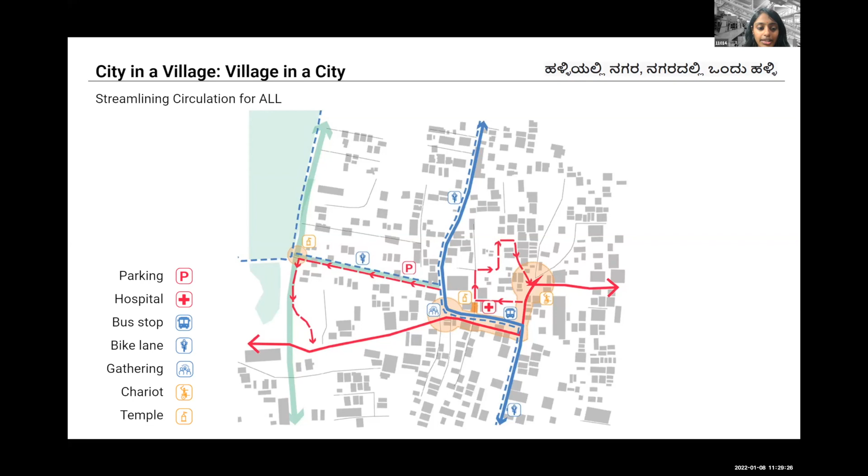The classic challenge of city being in a village and village being in a city is first addressed through a framework of larger networks. To maintain a sustainable relationship of the multiple modes, we have proposed segregated zones of lanes in the main Doddanekundi village zone. The narrow roads next to the temple and towards the lakeside are limited to one-way circulation. The bus stop has been relocated near the auto stand to enable modal exchange. And apart from cars, bikes, two-wheelers, buses, this project considers the chariot procession route as a part of the main traffic planning. So what are the different ways we are creating convergence?

We extend this framework through three integrated principles. First, temporal adaptability, to design spaces that are flexible to multiple programming. Second, adjacencies, creating synergies by positioning complementary activities together. And lastly, hybridity, reimagining elements to perform diverse roles and not cater to singular interests. So embodying these three principles, the site strategy is almost like a design framework.

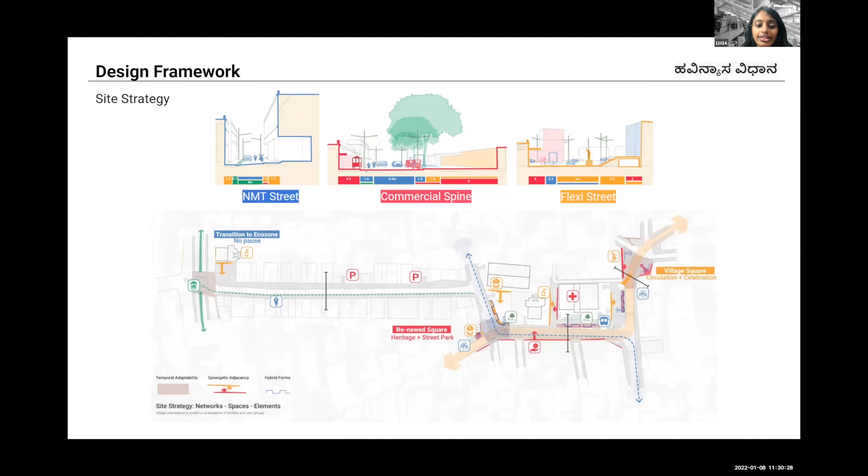A unique character has been identified for each street, and moving from right to left, we see a flexible cultural zone of the village square, then a social and commercial zone near the temple and PHC, and an ecologically sensitive non-motorized transit zone towards the lake. The street between the PHC and the temple right here is pedestrianized. The area around the inscription stone is reconfigured to create a renewed square, and edges of the institutions are reimagined as creative hybrid zones.

How can we maximize space? The challenge that a congested urban village poses is the availability of space. We reimagine compound walls to maximize space and create new social and cultural opportunities within this congestion. Peripheries are reimagined as zones that are reclaimed by the public to use in multiple ways. The modularity and temporality of the elements allows for affordable uses.

For example, this area can be used for prasadam distribution, evening gatherings, floor-level vending for tender coconut stalls and cobblers, and smaller day-to-day kacheris. A PHC kiosk has been integrated to cater to the Thursday vaccinations, which reduces crowding in the main PHC center. A bike stand and docking enables easier and increased access.

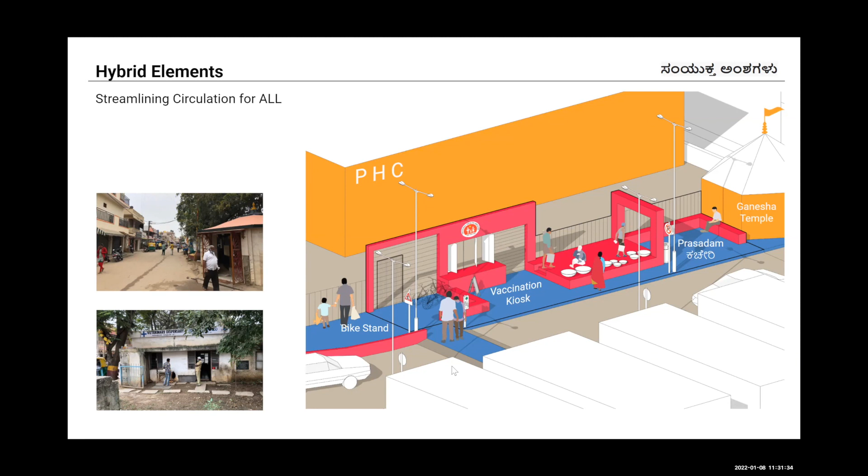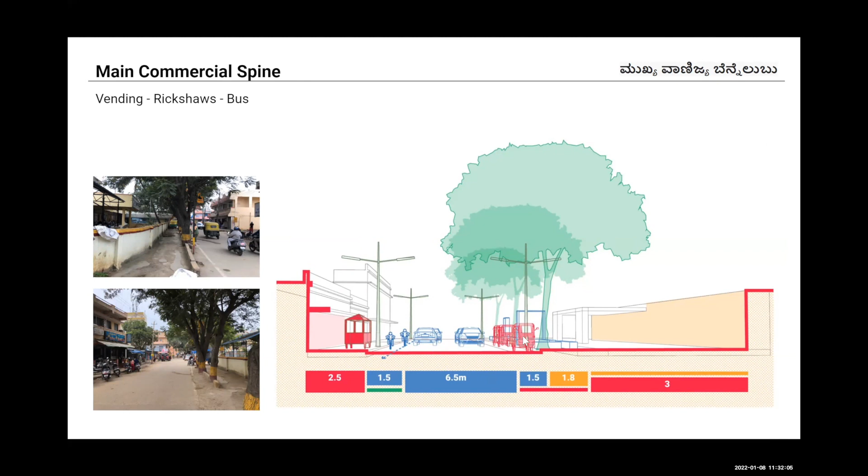The wider street is imagined as the commercial spine of the village, with auto rickshaws, cab drop and pickup, and bus stops planned within the spine for easy access. There is a wider sidewalk that is bordered by vendors facing inward rather than outward as currently. A two-way bike lane operates more comfortably for bike riders alongside fast-moving traffic. The hybrid elements provide a space for relaxation of auto drivers under the trees, thus layering multiple zones together that lead to a flexible junction.

So how can we make these junctions flexible? While separate lanes channelize the traffic on streets, the junctions will be made more adaptable with different programming over changing times. Thus, we imagine these junctions as flexible and transitory spaces that accommodate both requirements for the festivals and the cars.

So coming to the village square, the junctions currently see traffic congestion but also become a potential socio-cultural node in the urban village. The square is a temporal zone that transitions with changing needs of circulation and celebrates in a culturally rich-rooted context. On a day-to-day basis, the grey road continues to operate seamlessly for the vehicles to pass, and on the days of celebrations, the celebrations happen on the blue zone and traffic continues to move without disturbance on the side.

There are several elements supporting these festivities, like the hybrid elements for temporary stalls with the vending demarcated by the removable bollards. On the right, a multi-level step seating is designed to watch the Paliakki Uttsava, similar to the Mysore Dasara processions, while on the other days it acts as a public space.

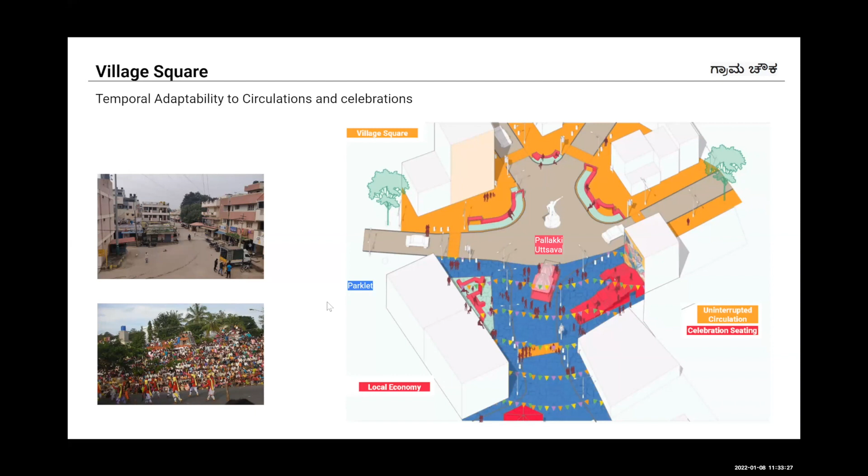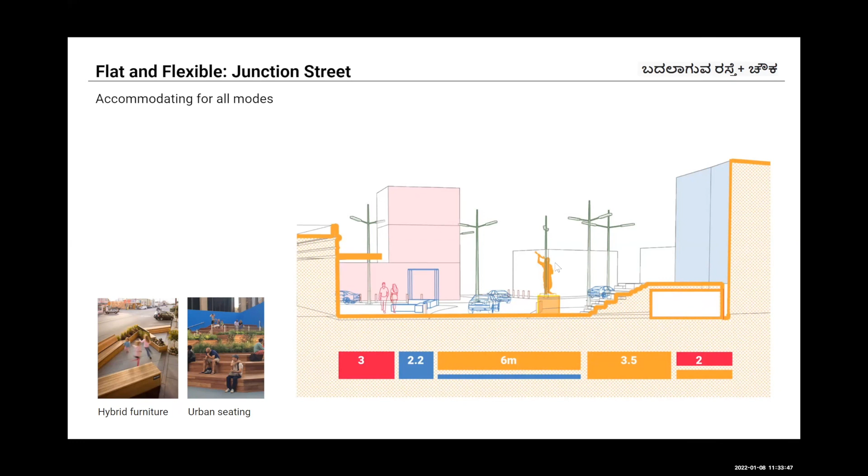The junction sectionally is flat, but with a cobbled paved zone that would allow the traffic to slow down. Considering the scale and the nature of the place, instead of having a traffic signal, the sculptural island redirects the traffic continuously without any waiting and remembers and celebrates the leaders from history.

Moving to the junction towards the Rama temple, the street is pedestrianized to allow vending activities near the entrance of the temple, organized shoe storage, urban seating, cycle tracks, and safe places to play. These can very well transform for a festive occasion and other events like Uruhabbas, as one can see in the GIF playing right now.

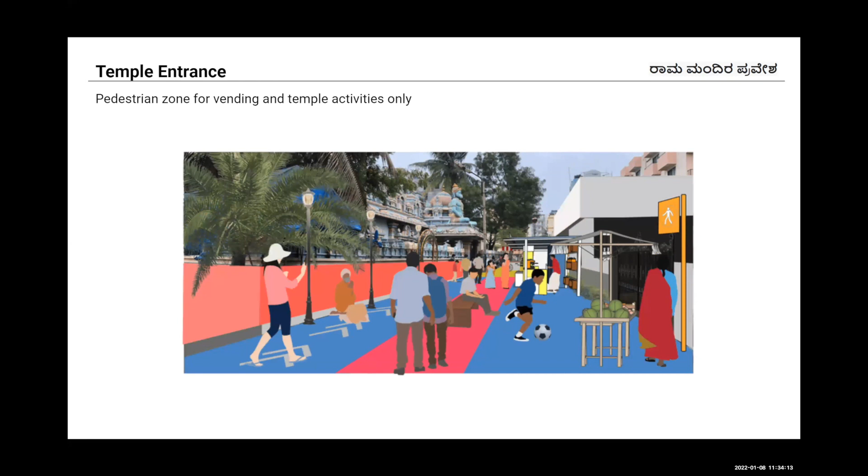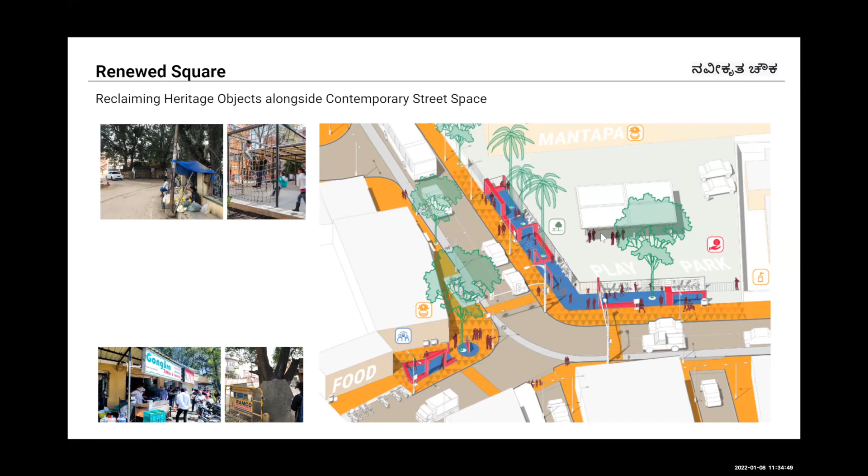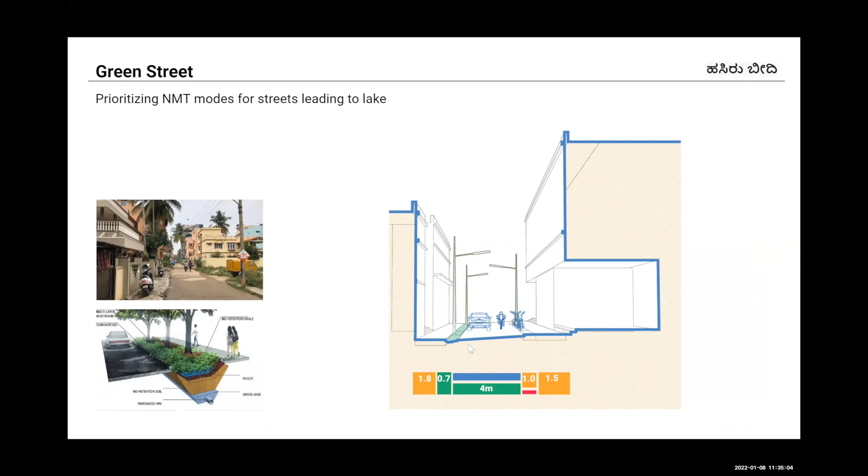Moving towards the lake is the non-motorized transit zone. Slow-moving traffic without segregated lanes accommodates cars and bikes. The open drains are modified to eco-bioswales to harvest rainwater into the Rajakaluve and lake. Unlike a recreation space for pause, this is designed as a node for eco-transitions.

The bridge has been widened to let only pedestrians and bikes pass. The lower side of the bridge is transformed into a filtration barrage to treat the canal water. The sidewalk on the side of the Sai Baba temple is widened for easy movement and activity of devotees.

Who will participate in making change? This change is made possible through an integrated stakeholder participation. The spatial strategies can only be successful through an effective integrated implementation model that is neither top-down nor bottom-up only. This project suggests a bridge model that invites the local institutional organizations like temple trusts, PHC, and Uruhabba committees to initiate and contribute to the efforts of the ward committees and BBMP.

Private organizations like Vendors Association, Shuchi Mitra, resident welfare groups, CSR funds of IT communities, Waste Management Committee, and Pourakarmikas serve as weaving forces to represent the needs of the village at par with the demands of the larger region. Convergence models would help develop a clear monitoring and evaluation system to formalize the efforts from tactical interventions to long-term solutions.